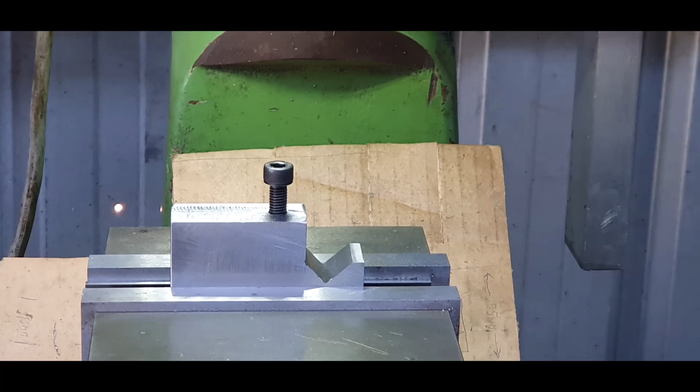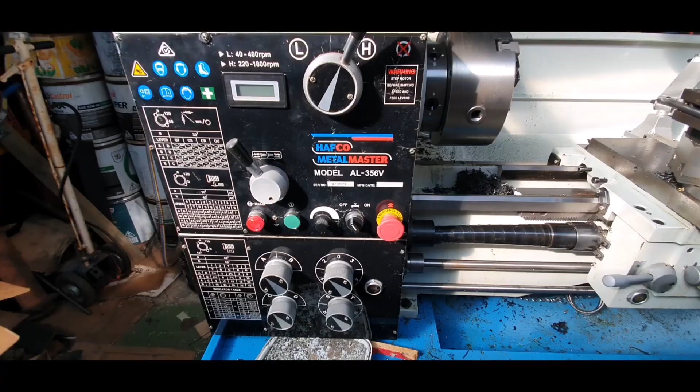Okay, now that we've got our milling machine running again, it's running well, pretty well spot on, we're going to have to go back to the original job. And the original job, as I was saying, is the stop, which goes onto the AL356V, as you can see it. Now, this particular machine has got an 8-inch jaw, which is a 3 jaw.

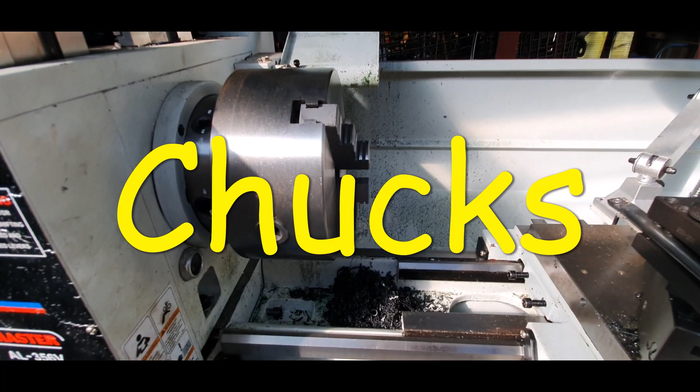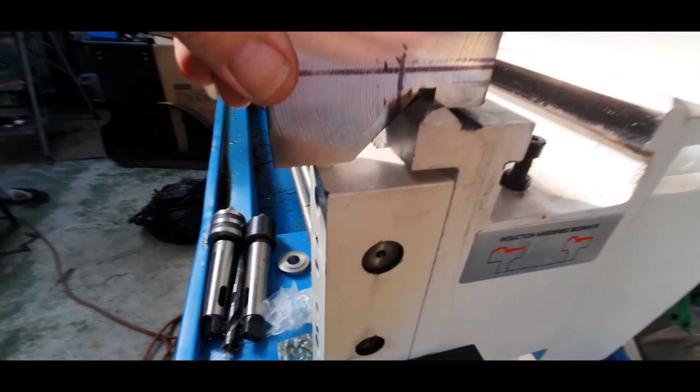I've got a 4-inch as well. All the faceplates, etc., not that that's here nor there. That's the actual stop that I started to make. Now, I can show you from the end of the lathe itself, which is a lot better. As you can see here, that's sitting reasonably well.

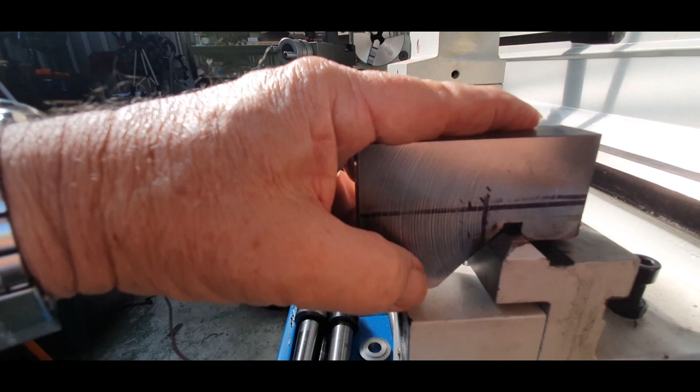The only problem is I went crazy on the milling machine when I was testing it, and I cut too much out, so that corner should be there. It's not, so I'm going to have to make a new piece. But at the same time, just to explain, this black line, everything above it has to be removed, and the reason it has to be removed is because if that is sitting on there and it's bolted down,

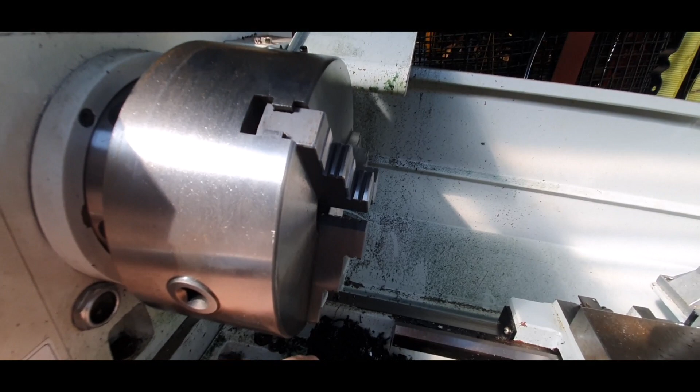it doesn't matter whether it's an 8-inch, 6-inch or a 12-inch chuck, it's not an issue. What happens is if you open the jaws right up, that's going to possibly hit on here, which is the top of your stop, so you want that as low as it can. So that's about 30 mil there, so that's 30 mil extra you can use. So it just depends, you might have the stop there, might have it here.

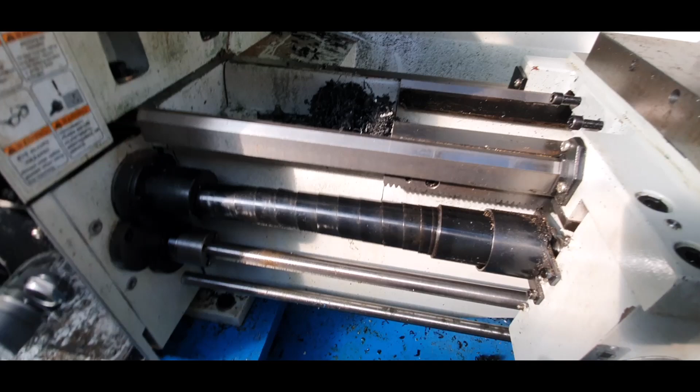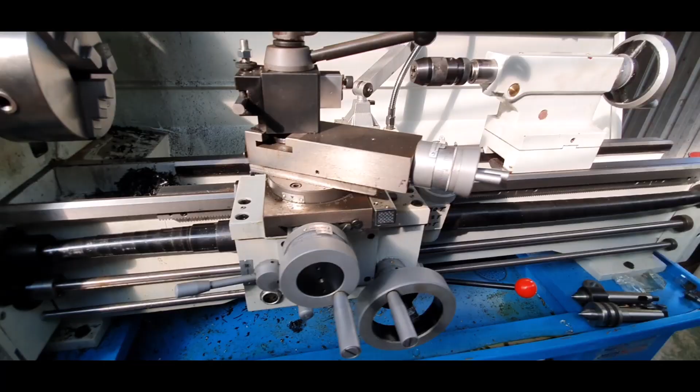But what I'll be also doing is where the lock goes underneath here, that's got about a 30 mil section in, but I'm going to only have it so it only goes in about 10 mil, and that'll come up against that, so then I can place it on the saddle. I'll be able to use it here or on the other side or wherever I like. Otherwise we'll catch back on the milling machine.

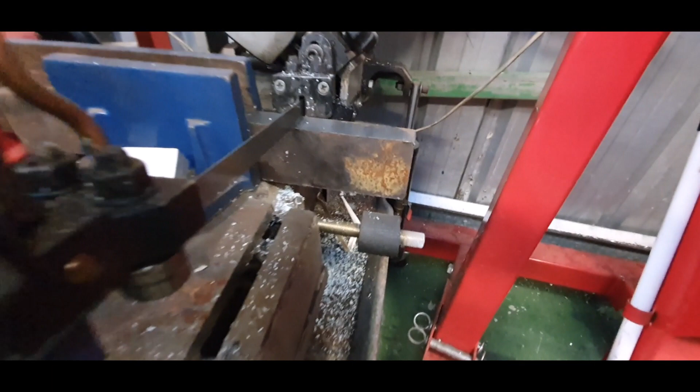Yeah, so I've got my bandsaw out. I've got a piece of material in there. I'm going to make it probably 100 or just over 100 mil, and then once I've cut that off, I'll face it all, square it off, and then I'll start marking out to cut it all out again.

So as you see, just starting on the first cut now. That's gone a lot quicker than I thought it was. Whoa, there we go. Just throw it all around, she'll be right.

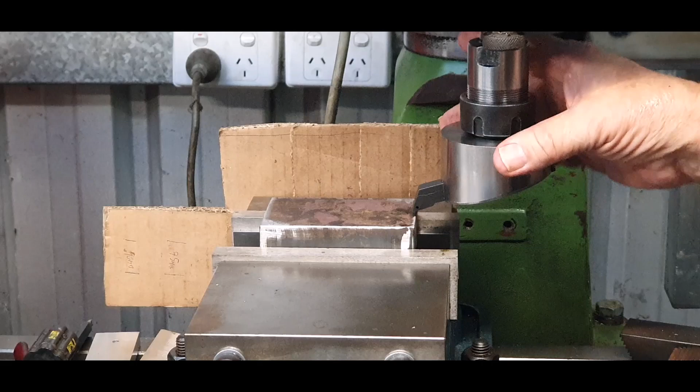All right, as you can see, I've got it set up. I've got my fly cutter that I made in the previous video, and we're going to just flatten it out, so it's virtually a clean surface. Turn it over, do the same on the other side.

As you can see, it's a fairly nice cut here. You can just about see the reflection there. Probably tell the time if you put your watch in there. So that's nice and smooth, it's quite good. What I'll do now is turn it over, do the other side. I won't worry about these sides or that end at this stage.

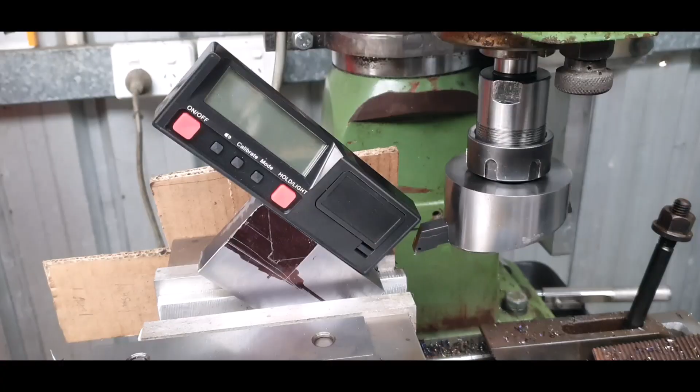I might just do one end because I have to mark it all out. So I'll use this particular surface to mark out exactly where I'm going, according to the mistakes I made on the other one. Anyway, when I've faced them all and I've got this set up, because I'll be having it out on a 45-degree angle, then I'll come down with an end mill and I'll cut out my 45 degrees from there.

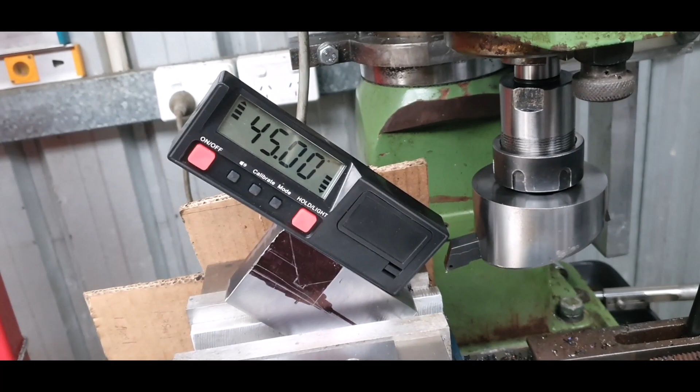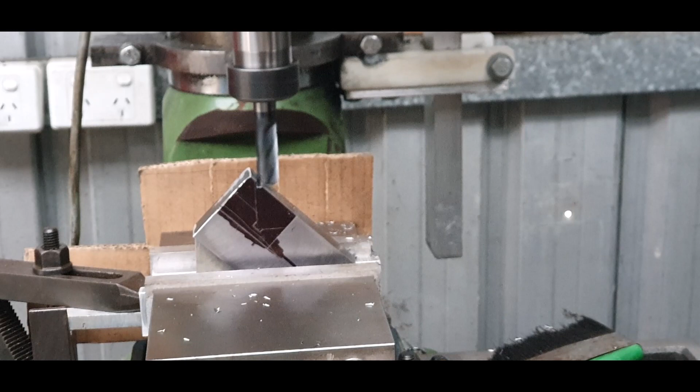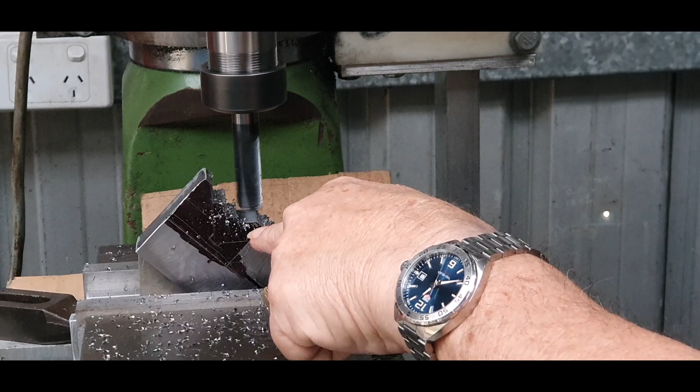Alright, we've got our piece of metal in the vise. As you can see, I've just roughly marked out the 45-degree angles, which will be a 90 when it's turned over. Oops, this has gone out. As you can see, that's a 45-degree angle. And then I'm going to brace it under here and lock it up on that side so it can't move anywhere. So I'm actually putting steps in it, and I'll get down a certain amount, take it across, then work back, then come back down again.

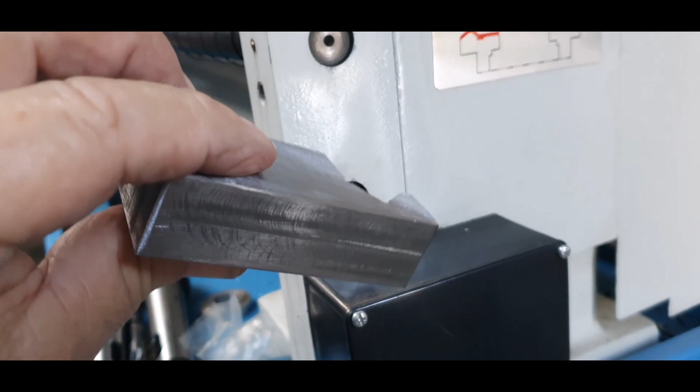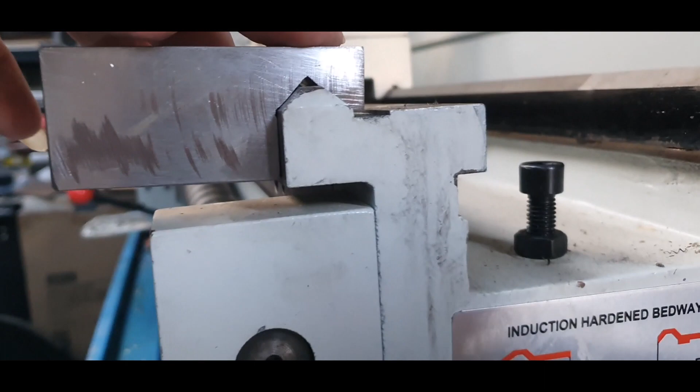Alright, this is what we've got at the moment. This is the top part. It still needs to be cleaned up a bit more, but that's fine. You've got the angles and everything else. Now, I'll just put it on the edge of the lathe itself on the bed. And as you can see, that sits quite squarely. Your 45s or your 90s exactly spot on.

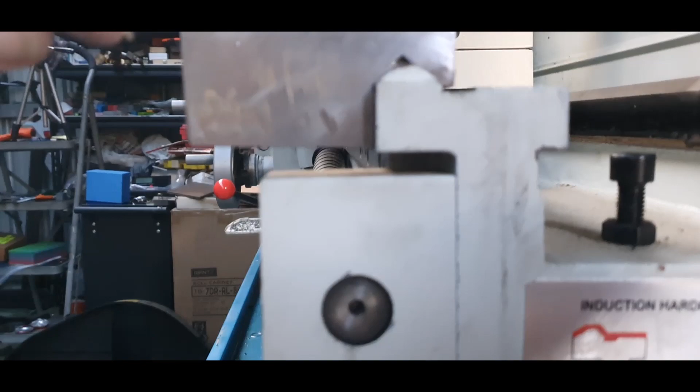There's a gap in here, so there's no problem. And I've got a small gap under here. So now the next part will be a plate from there right across there. This part will be stepped, probably about 1 mil above the rest of the plate, so that a bolt will be going down through here. Then that'll be clamped together. I'm not sure whether I'm going to put 2 or 3 sections in here, but anyway, we'll have to wait and see as we're progressing.

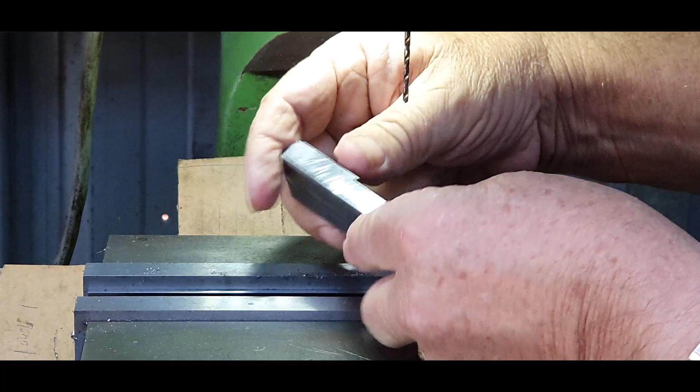Just done there is I drilled a pilot hole. Now that's in this piece of metal here. Now what happens there is I made this off camera because I didn't realise it wasn't running. Anyway, I made this bar here.

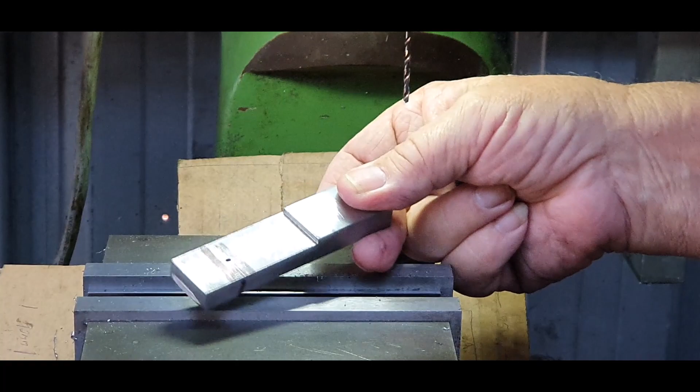Now what happens is that will fit onto the lathe like that, and then that part here will be underneath like that. That still has to be trimmed off. So what happens is, in essence, there'll be a hole through there. Whoops. Now I've got an 8mm bolt. Now I'm going to drill that right through. That'll be sitting in possibly about halfway into there, so it doesn't lose too much tension.

Then I'm actually going to bolt it from the bottom. So what's going to happen, as you can see, that'll be sitting on there like so. There'll be an air gap, and then when I pull that up, that'll lock it all together. Now the idea is going to be, because I've got it upside down, I can put multiple whatever in the top here.

If you imagine, I could put a dial gauge in the top. I can put a fixed stopper, so that's a fixed one, so I can just put it straight up to it and cut it directly. Or what I'm also going to do is put a micro switch that goes through there, so if something happens, the lathe will automatically shut off, and I'll show you all that a bit later on. So that's how it's going to be sitting eventually, like so.

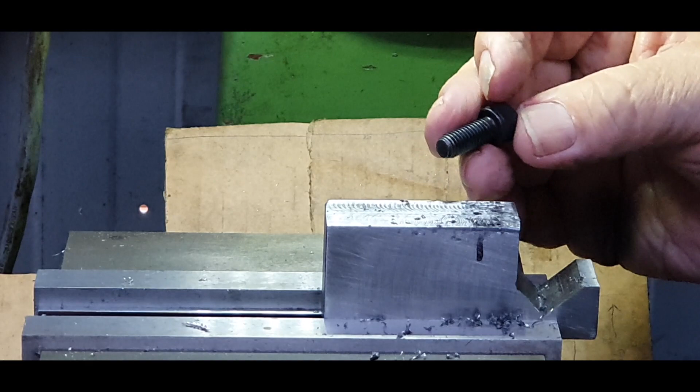Alright, I've got my main block in there now. What I'm going to do is drill. It's only a pilot hole. I have to take it easy. It's only a very small drill bit. So, like I said, that's going to go in full depth, and then I'll put a thread in it and then work out the top when I've done that. That is an 8mm thread, so I'll drill out a hole appropriate and then I'll actually put the thread right in.

Right, what we're going to do here, I've got an 8mm hole in there, but because we've got that type of head on it, I'm just going to recess it just enough for it to locate. I don't need much of a recess, it's just enough for it to sort of go in there like so. So that's just for it to sit in there type of thing, so that should be alright.

Alright, what we've got now is our locking block with all the angles and everything. This is upside down, of course. I've got the thread in here, as you can see. Now, we've made this little lock plate. Needs a bit of a clean up on the base, but that's fine. Now, that lock plate comes around this way. If I can find a hole. There we go.

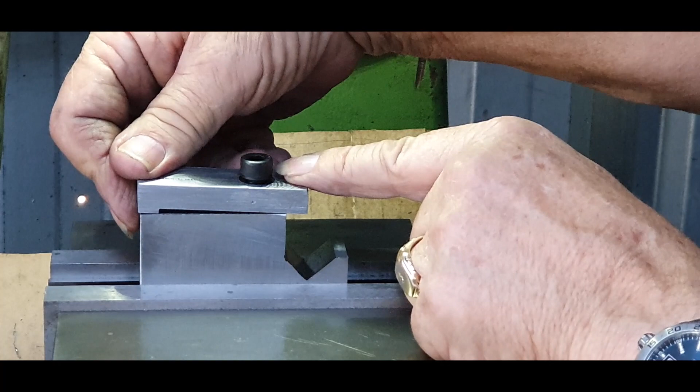Now, as you can see, there's a shoulder on that side there. That will sit there, and then as I screw that down, that's going to lock in onto it, and that'll be right. Then I'll just loosen this off and put it on top here. Okay, now I've got the option. If I want to, I can put a hard stop coming off on this side here, or I've got all of this area where I can put 2 or 3 stops in there.

Well, it doesn't matter, we'll put a hard stop here. I've got a micro switch assembly which is going onto it as well, so if it does go too far, it'll hit the micro switch and turn the lathe off automatically within probably half to 1 turns of the chuck, so it's pretty quick.

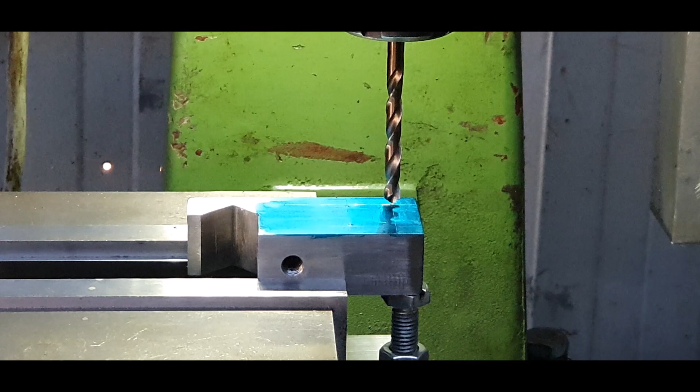Alright, with the top section of the actual stop, we've got 3 holes. There'll be one here, one there, and one over here. Now, the reason for 3 holes: the first one here, I'll put a dial gauge in, and the dial gauge is approximately 9.5mm, and then that will have a lock bolt going from the side to tighten that up. That's a 9.5mm hole here. It'll have probably a 6mm screw going in the side that'll hold the actual gauge in there.

Now this one here, I'm putting another one which will be a hard stop, and that'll have a bolt going through from the other side coming out, and that will be with a 10mm by 1.5mm thread. And then I've got a third stop down here, which people might think is silly, but that's going to be one that'll house an electronic switch, like a micro switch, because on the lathe I have got micro switches for automatic stops if I need to. So I'm going to put all 3 in. I might not use all 3, but I'll get it all ready for it.

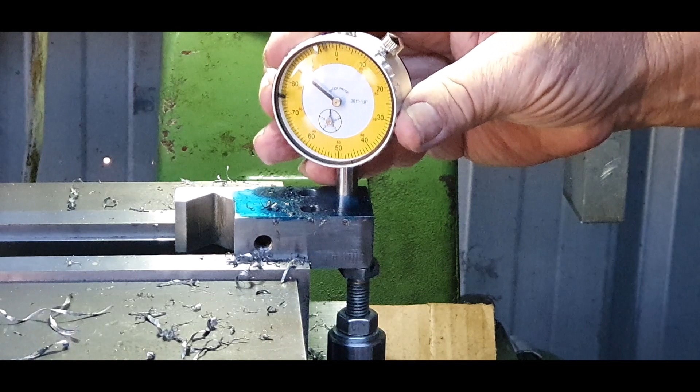Now, I haven't tapered this or chamfered it or anything at this stage, but if all goes well, that should pop in there. Oh, look at that. It'd be nice and snug going in there. I'll just clean it out a fraction. It's a bit of a burr on the other side, that's why it won't go through.

But other than that, that will sit like that, but on the other side, of course, that will go down to that point, and then as you can see, that'll work. And we'll have the grub screw in the side to hold it on. So it's not over snugged, it's just nice. Now I'm drilling, I'm going to put a 6mm bolt in there, 6x1.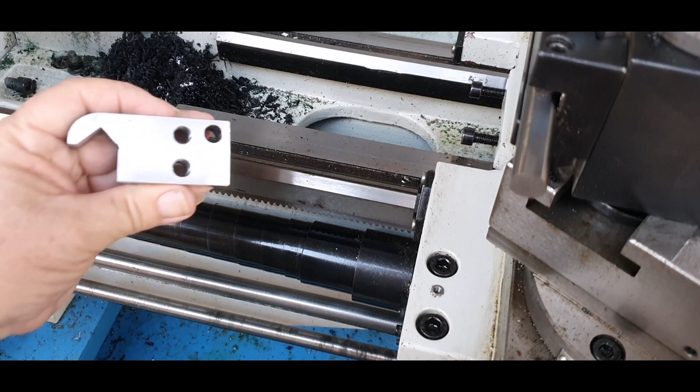I'll do the rest in the vise. It'll look safe. Alright, we're back over to the lathe now. Now what we've made is this particular unit here, which is the part of the carriage stop. That's your carriage which goes across, of course. Now as you can see, there's 3 holes in there. That particular one is set up for the actual dial gauge itself.

Now one of these two, irrespective of whichever one you want to use, you can use as a complete dead stop, hard stop, whatever you want to call it. And the other one will be for a micro switch system, which will automatically switch the lathe off. Now that will sit on here, and it will also sit in here. And as I showed earlier, there's the rack under here, so they'll fit in there quite nicely, so it's no problem. Then we've got the bottom half, which fits in like so.

Yeah, and as you can see, that's got a definite shoulder on there. You can see that. That's nearly virtually 2mm, doesn't really matter. Now that will sit on that way, like that. Alright, so that'll actually lock it on. Now to put it on, I've got an 8mm bolt here. That's a proper one like that. That will fit in there, as you can see.

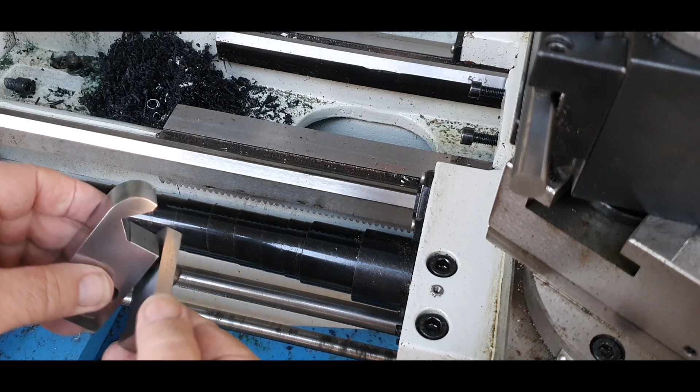Just do that up. Now you don't have to take it right off, because you can actually put that on and then slide it back underneath. So that's what we'll do at the moment. We'll just put that under there, slide that across, and so that'll be there for the moment. Now I can understand, I have got the bolt from underneath, and it is a fraction more awkward to put on. The reason I haven't got it on from here is because this way allows me to put more hole system wherever I need to put them.

Now I have got, you can see that's a proper Allen key. It's not really that awkward. It's just a matter of lining it up. Just make sure that's all straight. Then you just do it up tight, like so. There's no movement whatsoever. I can't move that.

And then if you want to, you can either have a hard stop, which is just a plain threaded bolt, or whatever you want to put in. It doesn't really matter. You can actually put that in like so. Now that thread is all the way through. You can have it 6 inches or 150mm long, or whatever you want, or you can adjust it to a short span like that. So it's a matter of undoing that, as you can see, doing the nut up.

It only has to be like that, so that when the lathe comes up onto it, it'll just lock straight onto it. So there you go. It can't go any further than that. So that's that part of it. Also what we've got is a dial gauge. This one happens to be an imperial one. Now that will slide in there. Now I've got it so that the cap or the adjustment ring will sit just above that.

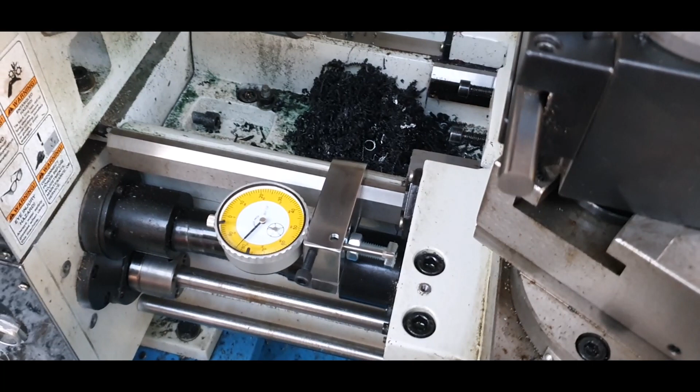Then we've just got a little 6mm grub screw here. We'll just do that just snug. It doesn't have to be tight. You can see the dial gauge work, and as it comes through, you can either have that in conjunction with your hard stop or whatever you want to do. So you can see that you can either do that manually.

Like I said, I've got DRO, but I can use this in conjunction with a hard stop, whatever I want to do. The hard stop I can use if I'm threading inside the chuck, like inside a job on the internal. I can actually preset the full depth of it, put my tool in, and then I can cut the thread in it, going from inside or out. Now also, as you know, there's another hole there, so that hole could be for a micro switch, or you can drill another one elsewhere, and that'll be for switching the lathe off on the automatic system that I've got.